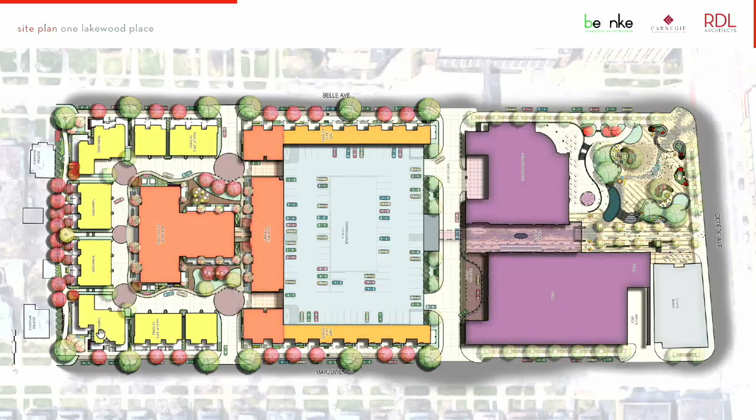This is an updated rendering that shows the direction we're going with the commercial building. The rest of this we've gotten recent approval from ABR with the residential. They really like where it's going, and you'll see some elevations as we keep moving forward. This is a rendering of the plaza, showing the Curtis block and the retail and commercial office component.

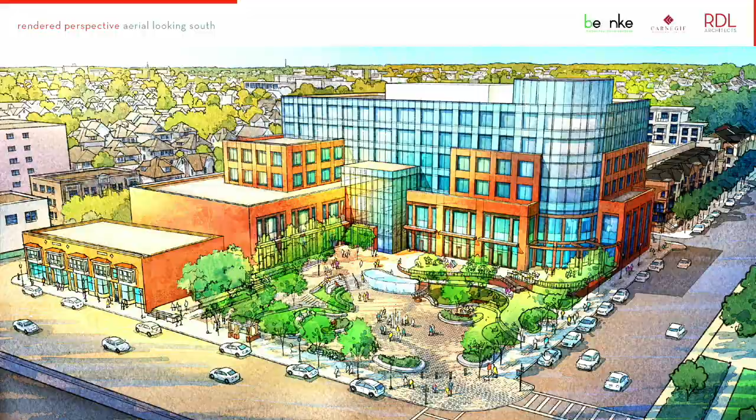So first we're going to go over building heights. The way this is set up, and most sections are set up this way, is there's a plan in the beginning. All of them are color-coded very clearly, and in almost every slide when you see the plan, the colors are consistent: gray for garage because it's cars and concrete, purple for mixed use, blue for the Curtis block, and these other colors for the residential components.

When you look here, we've tried to show the differentiations in the roof. On the office building, you can see 125 feet for a maximum potential height for this portion, 75 feet for this, and you see the setback we've done here to be kind to the residents on the street, which would be a 45-foot height. 46 feet here, and some of these have changed since what you saw previously. Similar here and here, there's a grade change from here up to here, which is why this is higher on this side. Walk-ups at 40 and 35 respectively. Again, this street right here is about almost 8 feet higher than here, so you actually drive down.

When we take these building heights, we're taking them from the point where the building meets the right-of-way. So from here up to the top is 35 feet. On the buildings that have angled roofs, it's to the midpoint of the roof, which is what the code requires, and that's shown in the diagrams. The text from the code is right here.

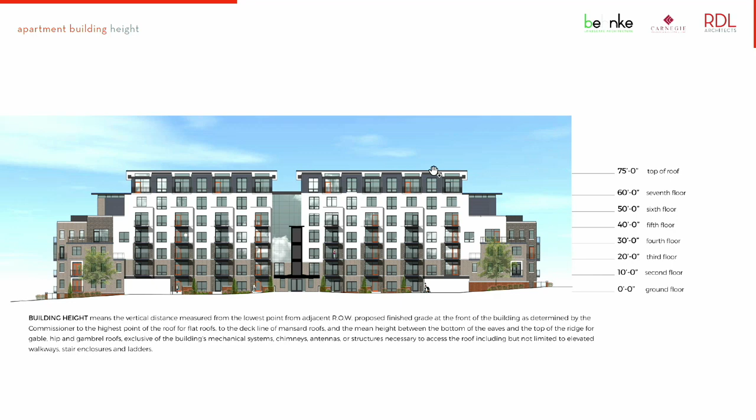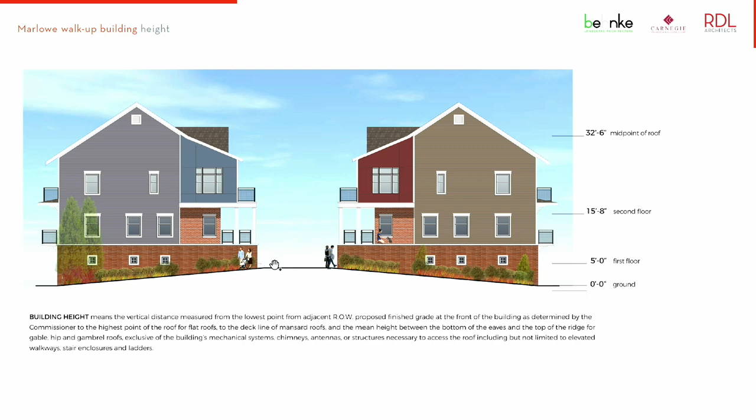For the brownstones, 46 feet at the top of the mansard roofs here. These are the walk-ups, so this 32'6" is to the midpoint of the roof, again, which is what the code states, where we take the height from. You can see the midpoint of the roof is here and here on either side. So when you're standing on the sidewalk, the massing of the building diminishes as it moves away from the street.

You can see here that grade change from the front of the building to the back, which doesn't really happen on Belle. Belle's from front to back is relatively flat across.

So these are the townhouses on Marlowe, 30'6" to the midpoint of the roof here. Again, you can see it on a side elevation, so it's much more clearly understood. And these are the townhouses on Belle.

So the difference between the units for the walk-ups and the townhouses on Belle and Marlowe is that we have that drop from the street level where Marlowe is to behind, that 8-foot drop. So what we've done is we've tucked the garages underneath the living space.

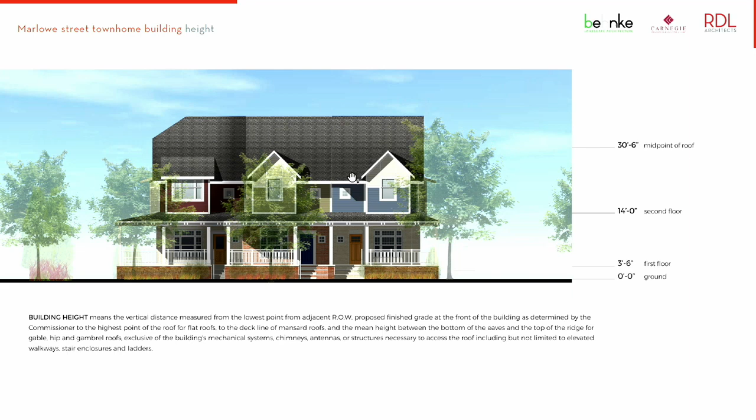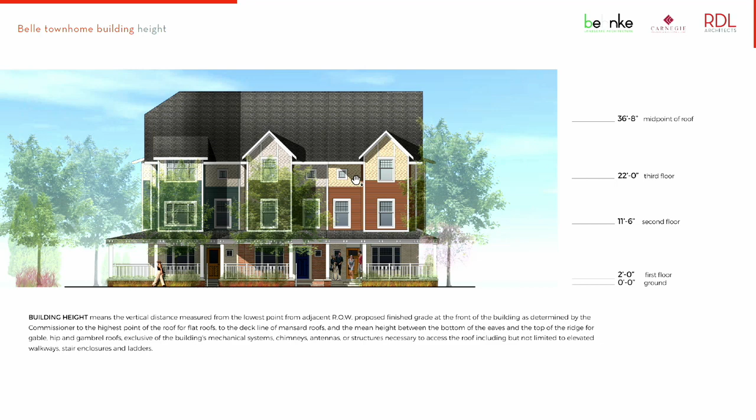We can't do that on Belle. So on Belle, the garages are in the rear of the first floor, and then there's either an additional bedroom or a den or some sort of additional living space in the front of the units.

So the next section are building setbacks. What we've done here is we've again used the same color scheme so that it's easy to locate what you're looking at. And then we've shown the building setbacks.

So here, when you see the light lavender, you can say 3'8" to 16'4" on these facades, depending on where it is and where the property line is.

This darker color, this darker lavender color, is 33'10" to 35 feet. The property line is angled a little bit, so that's where that difference comes in, whether you're taking the measurement here to here or the measurement here to here.

Same thing here for the apartment or for the brownstones, 9 inches to 3 feet. So depending on where you are along the sidewalk and where the property line is and the face of the building is, that's the range of the setback.

For the apartments, very similar condition on the sides here to the brownstones. The walk-ups, on one side we have a little bit more room than the other as far as the distance from the property line to the face of the porch, and that's where we took it from.

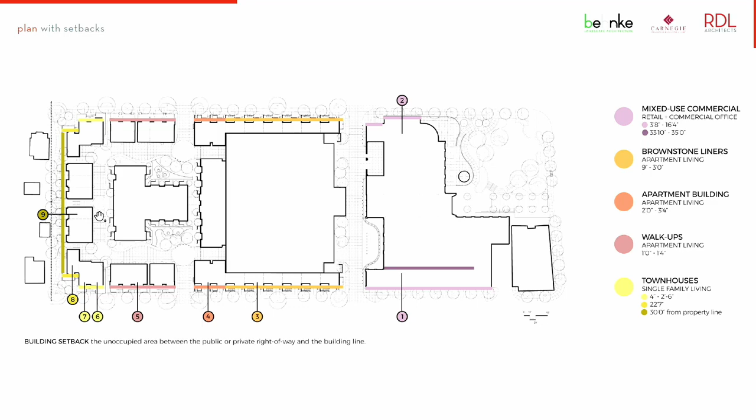That's one of the things that was talked about in the code where we can do traffic calming, and we are, all the way across the street.

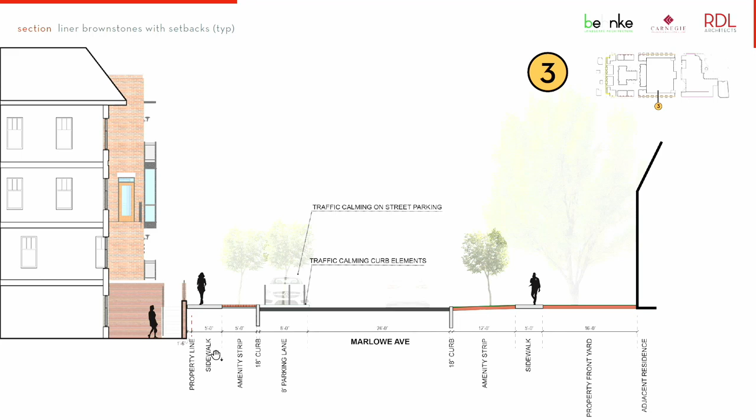This is the condition at the apartment building where, as you've seen before, we've treated the sides of the apartment building that face the street very much like we did the brownstones. So it kind of seems like an extension of the brownstone architecture as it wraps the corner.

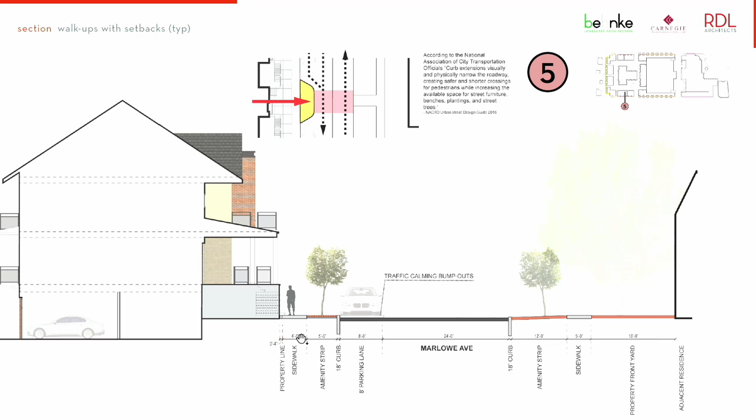These are the walk-ups. And this is a diagram from NACTO that shows the traffic calming features we've put into the streets, and again the property line, sidewalk, and amenity strip. So they're pretty easy to follow as you go from section to section.

And on every slide, as I mentioned last time, the text at the bottom explains things in further detail. Most of the time that's 100% from the city's code, or mostly from the code, with additional notes we've added.

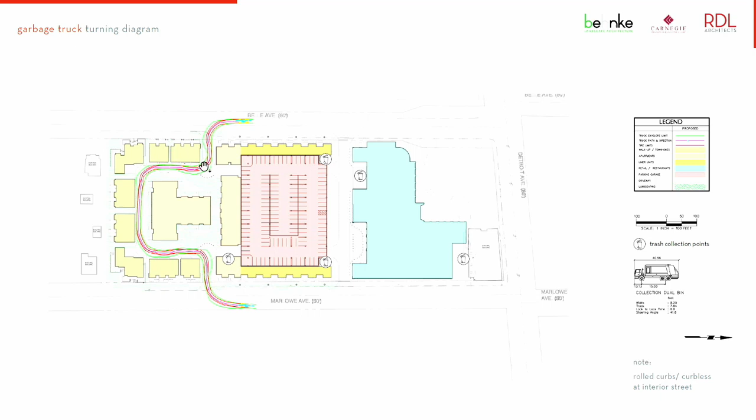So again, there's a fire truck, fire truck, fire truck. And then the garbage truck - when we show the garbage trucks, we've also shown the locations of the trash. So when the truck comes in here, he's going to back up a little bit, roll the trash out. This is the trash from the apartment building, load that up onto the truck, pick all these people's trash up just like you'd pick up any single-family residential trash. They'll put their trash out in the back, and he can get out. Again, they can do that here - pull in, roll the trash out, load it up. Pull over here, pull the trash out, load it up, so on and so forth as they go through. This trash here is intended for the brownstones, and this trash here and here is for the commercial users.

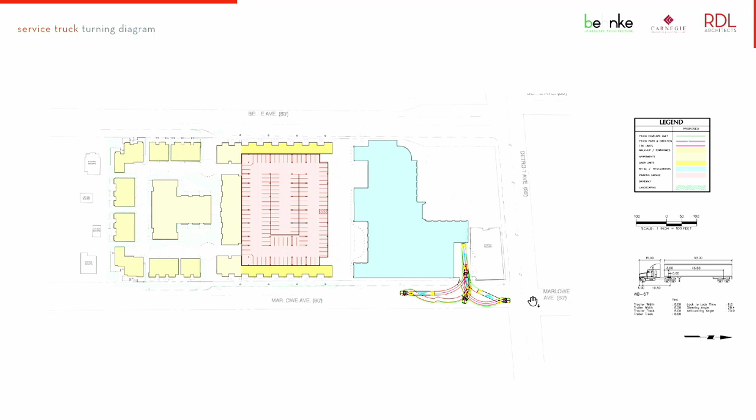This also shows how trucks would make deliveries. Trucks are required by the city to use Detroit Avenue and not the residential streets to access this.

So if your grandma moves into this apartment and she has trouble backing out, she can go over the curb and it's all good. She's not going to hit anything, right? Unless someone's standing there. But you can see all this here.

And this shows the dimensions in the plaza, and it moves through the site, so you can see everything clearly laid out.

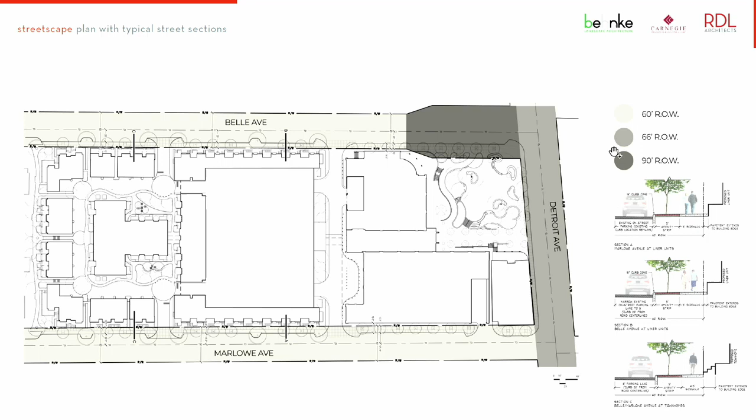Then here we have typical street sections, and the right-of-way widths for all the streets around. This diagram is also paired with the setbacks, so you can compare the right-of-ways and the setbacks all on one sheet.

For landscaping, this is actually more than is required for Planning Commission, but we already did it for ABR, so we're going to show it to you too because it's beautiful. You can see all the different types of plants, what the species are, the numbers of them, the sizes of them, and this is also divided up into different parts of the site.

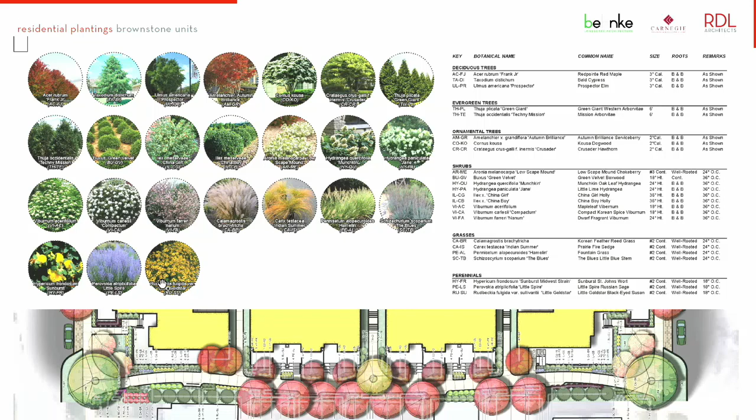When you look at the plan, it does really give you an idea of what it's going to feel like to be in some of these spaces. This is the paseo - these are the courtyards, the residential courtyards, the paseo that goes by the apartment entrance, and then the little street we have on the interior of the block. This is the paseo, the plantings intended for there.

These are the walk-up units. You can also see here what's intended for the streets. Again, you see this information in multiple ways throughout - where we have the street section, you're going to be able to see what this is and understand it. You can also look at it here in plan and understand it.

So by comparing some of the sheets, there's a lot of information - it's the same information shown in many different ways, so you can really get a good understanding of what it's going to look like. This is the commercial building along Belle Avenue, and then the commercial building along Marlowe Avenue.

Circulation - we've divided this up into pedestrian and vehicular circulation. So on this diagram, you see the primary paths. These are really like pedestrian circulation through the city, so you're on a city sidewalk.

Secondary circulation paths cut through the site - this is the paseo. These are the two major paseos we've created through the site, and this is the additional street we're bisecting the block with.

These show the primary ways of entering up to the Winter Garden and accessing the commercial components of the project from the main streets. The tertiary paths are additional pedestrian paths we've put through there - a cut through on the block, and cut throughs from the Paseo back into the apartment building.

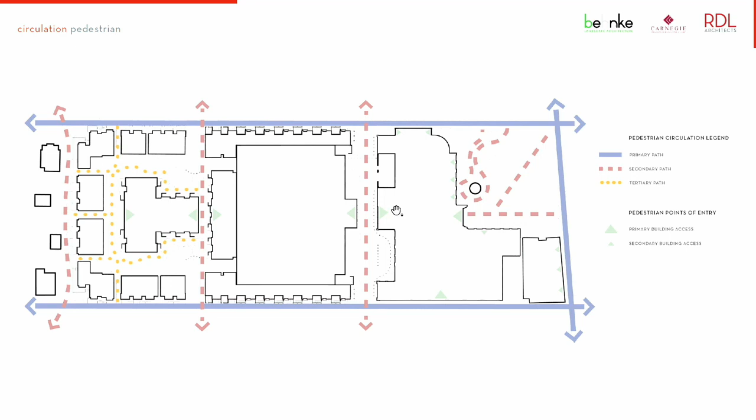Chris, you want to come up and talk about traffic?

So it's always tough following the architect because they have pretty pictures and everything looks great. And then I come up to talk about traffic, and nobody likes traffic, so... I was going to tell you not to make them snooze. But yeah, so I will try my best. Thanks, Greg, for going first.

To recap briefly where we left off last meeting, I gave you a big picture overview of what the traffic study was and what it included. One of the things I wanted to recap was we did a trip generation comparison - basically how much traffic the former use generated, the hospital on the site, versus what the proposed use would be. Those calculations yielded that in some cases the proposed development was a little bit less, in some cases maybe a little bit more, but overall almost kind of a wash.

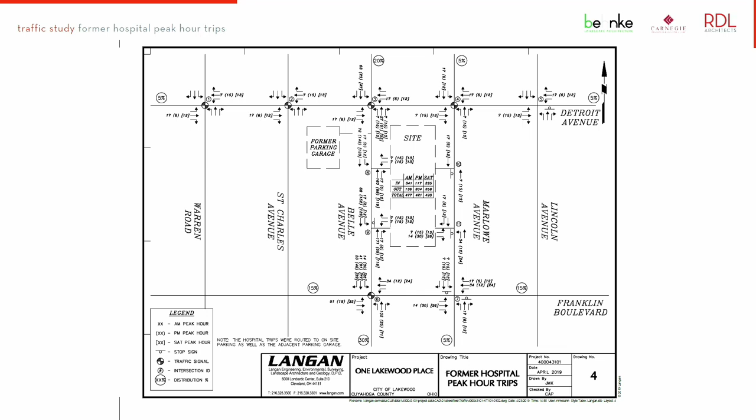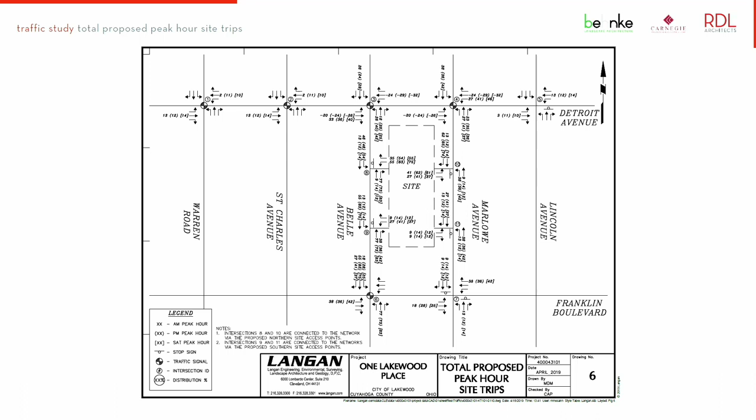This next one shows, with that change in the shift in traffic, what that no-build condition would be. We updated those volumes and updated the analyses. Likewise, we made some slight adjustments to the distributions for the proposed development. This figure then shows what that would be when you add the existing volumes plus our proposed development on top. We run through calculations to do this grading system on how traffic is operating.

In the report, it's a bunch of tables. We tried to condense it here for you, I guess, to better illustrate so you don't have to sift through.

So basically, at an intersection here, we show what this left turn movement is operating at, as well as this shared through-right movement, and then overall what those two movements together make that approach, and how that approach is operating, on a grading scale A, B, C, D, E, F. And then when you do that for all approaches, it calculates how you grade the intersection.

Although you might not be able to see the various letters here, hopefully you can pick out the colors. So level of service A and B, overall intersection, we labeled with green. You can see all these intersections under the proposed build conditions, with the proposed development, are operating at a level of service A or B. So good, good, good, good, good - this is all very, very good.

This intersection here is operating at an overall level of service C or D range. Again, C or D is acceptable in urban conditions, so no issues there. Overall, with the proposed development, we're not projecting any kind of traffic issues specifically at the intersections and how they operate.

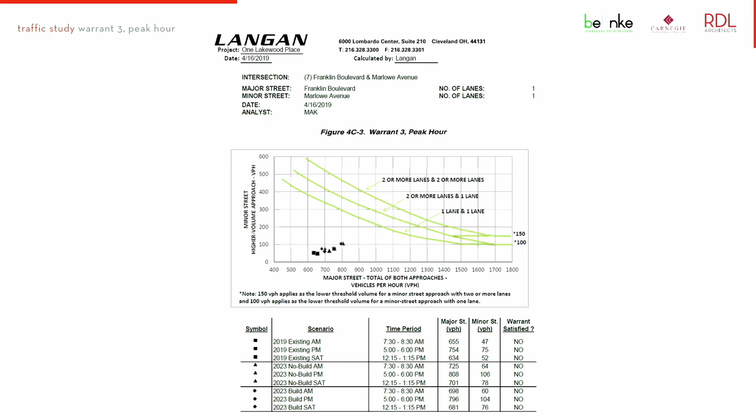Typically, if you don't meet a peak hour signal warrant, you're not going to meet any of the other 9, 10, 11 warrants. So it's a good rule of thumb just to see if you're possibly going to meet it or not going to meet it at all. In this case, you can see we're far below. You actually need at least 100 vehicles on the minor approach, on the Marlowe approach, to even hit the line. But to get there, you have to have 1,400 to 1,500 vehicles on Franklin, which in this case you can see we're down here.

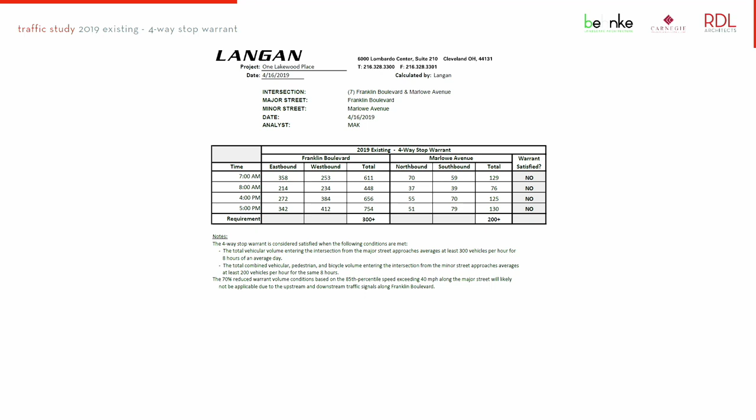Then we looked at a four-way stop warrant as well. The purpose of a four-way stop is when there's an equal distribution of traffic on all approaches. Again, the bulk of traffic is on Franklin, and Marlowe is very light. The Franklin approach needs to have 300 plus, which it does, but the Marlowe approach needs to have 200, which it doesn't. So this is existing, and then again with the former hospital, again we're not meeting, we're not coming close, and then with the proposed, again same thing.

So to answer those two questions, both the signal warrant and the four-way stop warrant were not satisfied. I think I hit on all the comments.

Thanks, Chris. Okay, so we're going to review the plaza. What we've done - this is an illustrative site plan showing the intent for the plaza currently. It's still something we're working on, but I wanted to go through how we got where we are today.

So this is a diagram that shows all the conditions we're going to talk about on one page so you can see how they relate to each other. The first thing that really set the tone for the design and the direction of the design was the topography. You can see here this is at 74 feet, this is at 83 feet. So there's about a 9-foot grade change that we need to make from this corner up to here. It's less from here to here, but not by much.

So what that did is we thought, okay, we need to put some ramps in here to get people up here. So what we've done is we've created two ramps that are ADA accessible, to the point where they don't need railings, so they don't feel like something separate. I had to walk down an ADA ramp today, and I was like, isn't there a faster way to do this? Because you're like, boom, boom, boom, and there's railings, right? So this is to create a really nice environment so everybody feels like part of this space.

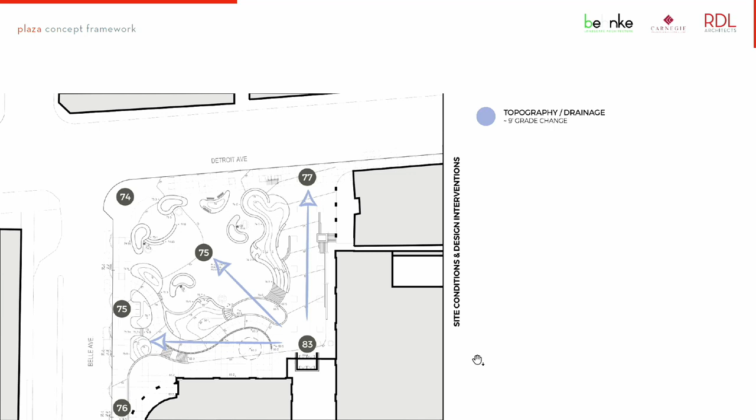In this area where we had to take up the grade, we put in plantings and used that topography to create a really nice layering effect, allowing people different vantage points from within the plaza, whether looking up or looking down. Changing the vertical space in a plaza makes that space so much more interesting for people to use.

The next thing is to define what is the privately owned public space. This portion of the plaza is that half acre that is privately owned land but intended for the public to use. It basically cuts out this portion, seen on another slide, that's for private dining for the restaurants. There will be public access up here, so the public will be allowed to come up on a daily basis anyway, but this is just getting into the technicalities of what the agreement says.

Here we're showing circulation. You can see these two ADA paths we've created, the existing circulation of pedestrians on the city sidewalks, and all the different ways we've created for people to move through the space. If you enter at this corner, you can go up this staircase, or up this other staircase, or walk up this hill with this break in the seating. As you enter here, you can cross the path there. The point is that there are a lot of different ways to move through this site, which makes it much more highly experiential and interesting for people.

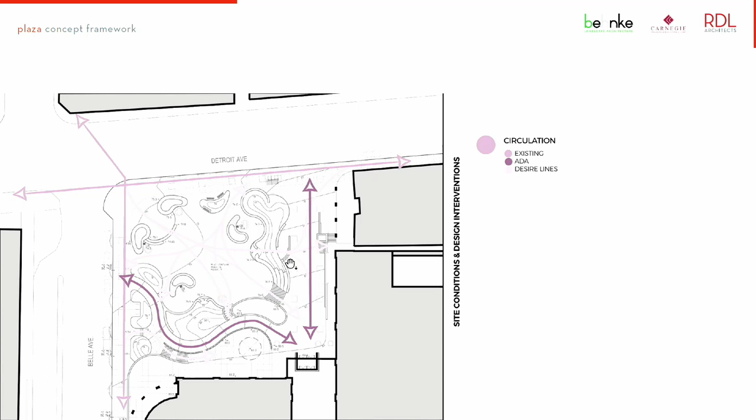The other thing we've done is mix a lot of organic shapes and forms with some formal elements, like the allée. There's a formalism in that when you walk in here, you're centered on the splash pad intended to be at this entrance. As you walk in here, you're going to look up over the water wall to the entrance of the Winter Garden. So there are all these formal views we've created. All of these things come together so that when people are moving through the site, it's going to be a really great experience for them.

Then there's the hardscape portion of the plaza. This lower portion of the plaza is intended to be pervious, and the rest of the site will use other different types of brick materials.

We have the landscape plan, so you can see in the darker green where there will be grass or different kinds of plantings, and the lighter green are the trees. We're thinking about this very three-dimensionally, not just the horizontal surfaces, but what's your experience in three dimensions - what's vertically above you, creating a canopy that provides shade and also absorbs some of the sound from the city.

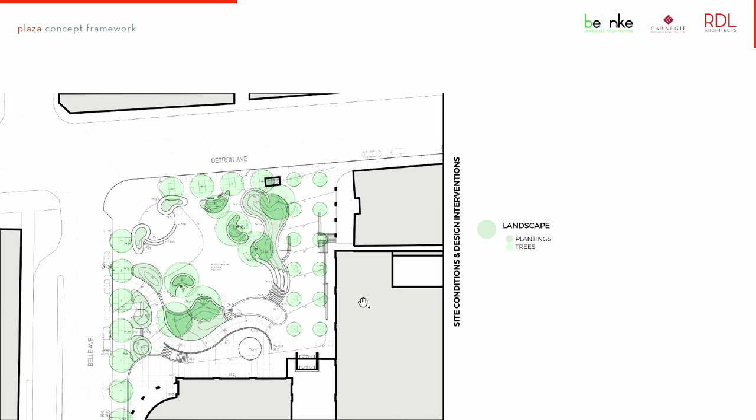Then there's seating - different types, fixed and movable, which you can see here. There are fixed seating elements along the walls, and various different types of furniture - movable furniture, park benches, which are also fixed. The point is we're using best practices here. One of the best practices is that for every 30 square feet of space, there should be 1 linear foot of seating. So we're doing our best to meet all those best practices as we design this.

If I were to go into all the details, it would be like a class in here, and we don't want that. I just want you to know that when we're designing this space, we're taking all those things very seriously. This portion right here and this portion right here are intended for outdoor dining for the various retail tenants that will be occupying these spaces.

This is a zoomed in look at the plaza. You can start to see how we've transitioned from the lower area to the upper area. The other thing we've done here is, this is a commercial building that will have retail and office components. Part of our client's ability to sell and lease this building is that the commercial office component has access to this plaza.

So we've divided it up into three primary spaces: this terrace up here, or veranda, as George likes to call it, which I think sounds kind of sexy; then this right here is the allée; and then we have a lower plaza here.

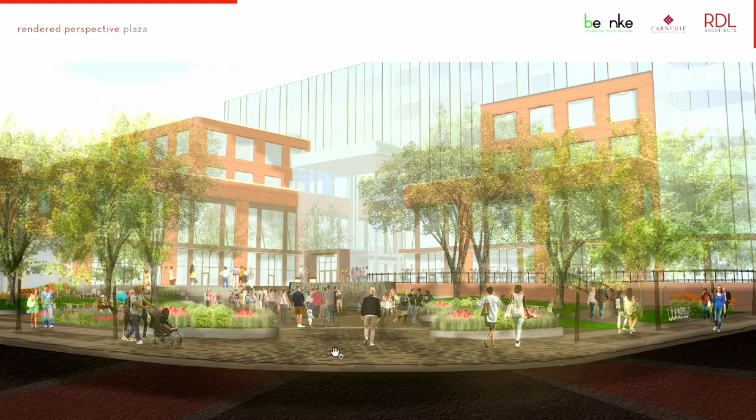This is a view looking from the corner in through the plaza up to the Winter Garden. This is not a final rendering, but it's intended to give you the feel of what it will be like as you're entering into the plaza.

All the light on the site will be at 3,000 Kelvin, which is more of a warm light. We're not going to do 5,000 Kelvin, which is cold. 3,000 Kelvin for the light across the site is going to be what's used.

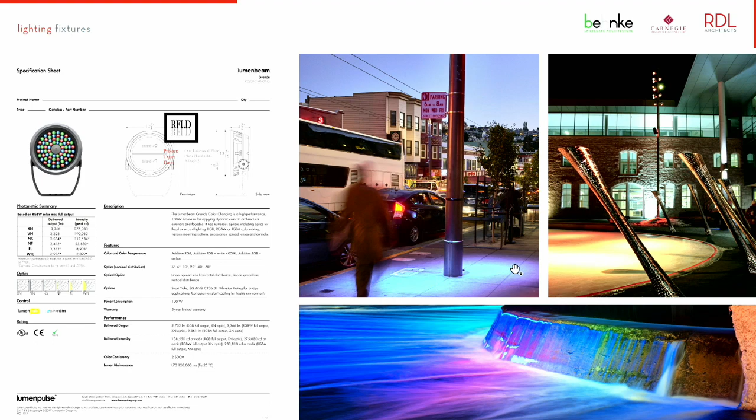These are the colored lights intended for the plaza. It's not going to be like Vegas, so it'll be gentle and soft on most days, but it gives the opportunity for the city to have an event. We were talking about maybe a winter solstice event as a counterpoint to the summer solstice that can happen in this plaza. Then we can light up the plaza in blue, violet, lavender, magenta, or whatever. This light is all focused right here in the center of the plaza, so there'll be fixtures that focus down on the center and create pools of light.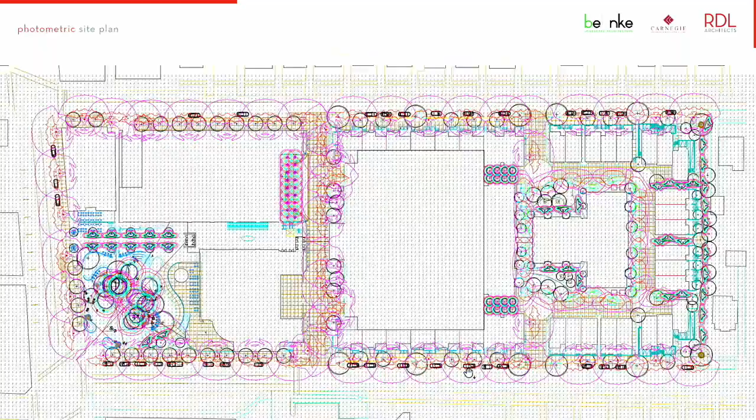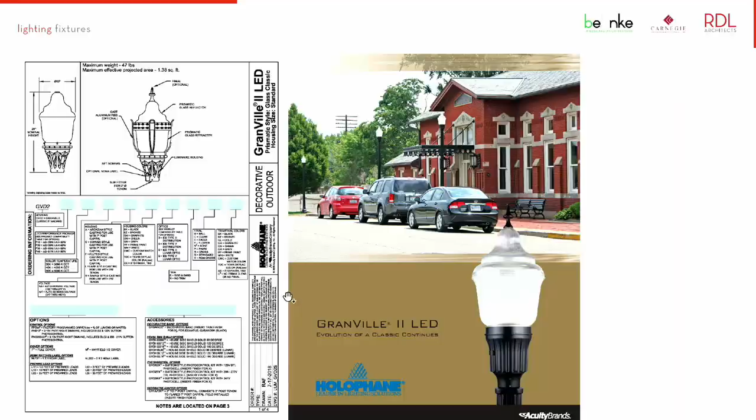This light is what's intended for all the benches in the plaza. Going back to the seating walls here, and underneath the seating walls on the islands, that light will be—not this curvy picnic table, but under here and here—emanating from underneath the seat, providing a soft, warm glow.

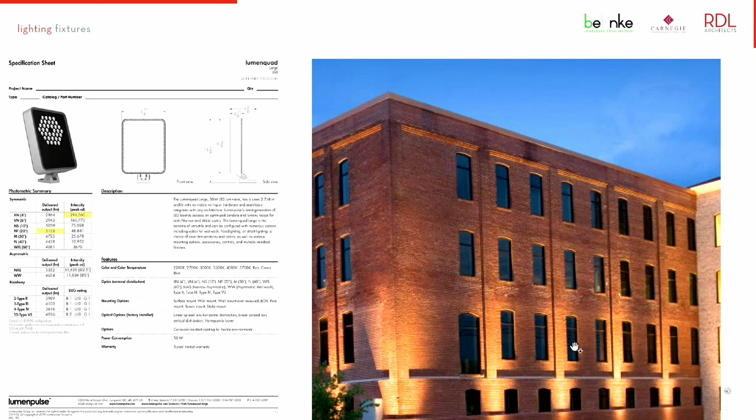The intention for the building facade is to be really subtle with the lighting, so only on certain portions of the building facade do we intend to do some gentle uplighting of the brick. And that brings us to the end.

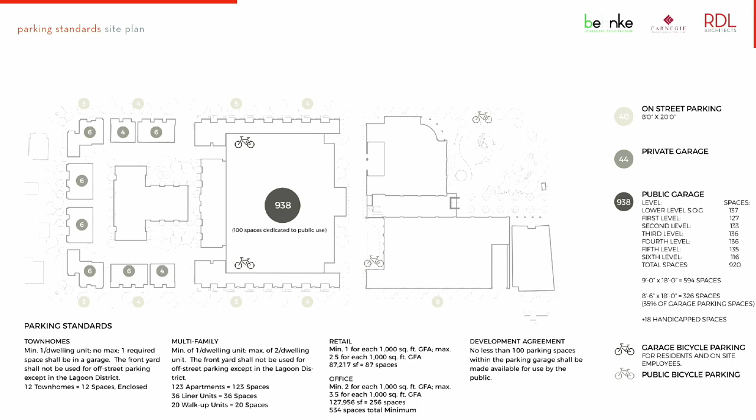Just a question for Greg. The Curtis block, Curtis building, the height isn't specifically called out in your diagram. Is that assumed that there's no addition at this point planned? Correct. We're still reviewing that, and we're going to be reviewing that with the Architectural Board of Review as things move forward.

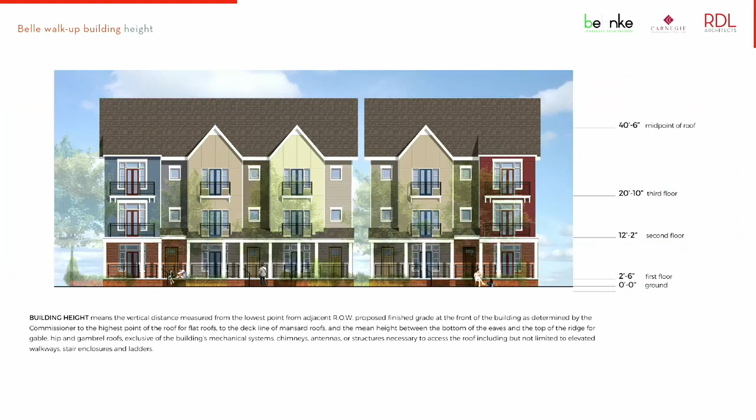God bless you. That's a designated landmark as well, right? So there's that whole process to go through for any additions. Yeah, any modifications, in fact, the design of that space is required to get what's called a certificate of appropriateness from the Architectural Board of Review.

Any other comments or questions at this time? I have a question for planning staff. So since a private public area is not regulated in the zoning code currently under conditional uses, do you recommend that we add a condition regarding hours of operation for the public square? Or is it the intent that it be open 24 hours a day for the public?

That is a great question. Can you allow me some time to think through that, maybe as we have some dialogue? I'm not sure, but let me take a pause and think through that a little bit. Same thing back to you, Monica. Any thoughts there? Let's circle back to that maybe in a few minutes. It's a great thought.

With that, then, I invite the members of the public who wish to speak on this issue to please come forward. Many of you have been here several times. Come on up. If you are going to speak, please sign in and tell us where you live and what your comments are. And the chair has the privilege of recognizing Master Cruson as, I think, the youngest commenter that we have ever had at the Planning Commission.

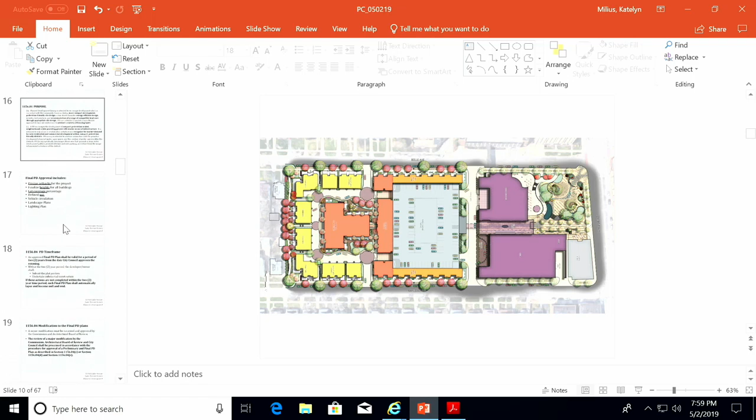Real quick, Mr. Chair, I can directly answer that. Ben, in Chapter 1156, there's two specific sections that address this. They're more framed around modifications. There's what's defined as minor modifications, which in the code is defined as anything that's not a major modification.

A major modification is the addition of property to the plan development, or the addition to an already approved final PD plan that would change the mix of uses. The major modification would essentially have to go through the City Council, Planning Commission, ABR process from start to finish. A minor modification would come just in front of ABR or Planning Commission.

So let's come up with an example. One of the floors of the office building goes from 6 to 5, or a major material change comes in after they value engineer the project, or something like that. It would have to come back before the ABR, and depending on the topic, potentially the Planning Commission.

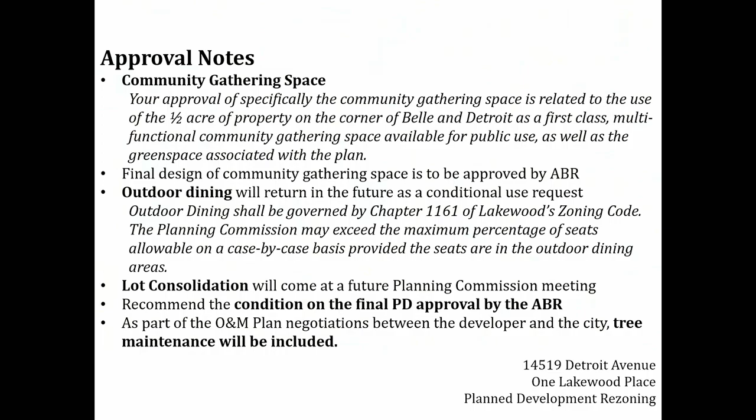Okay, we will move on to our next docket item, which is docket number 030519, Lake Avenue Homes, Plan Development. The applicant, please come forward, or?

We can do a quick intro. Maybe go back, if you don't mind, I can run them through that. I'll keep going, you're good. So, Mr. Chair, I think we're just trying to pull up the current plan set.

Just wanted to take a moment to introduce this project. Similarly to the One Lakewood Place site, we're introducing the WXZ and Dimmitt architecture team back in front of the Planning Commission. This project is being reviewed under the Plan Development Code. Tonight we wanted to put up a simple agenda for this docket item. We're shortly going to hear from WXZ and Dimmitt on the updates made since they received their preliminary plan approval vote in March with the Planning Commission.

The city has done some analysis it'd like to work through with the neighborhood and some of the code analysis. We're then going to turn it open to the Planning Commission for questions and feedback, then open it up for public comment and questions. We'll make all the notes and questions as public comment comes in, close public comment, and work towards discussion on those comments. The city is likely going to have answers to those. We'll invite WXZ and the Dimmitt team back up to answer those questions, and then consider a vote at the end.

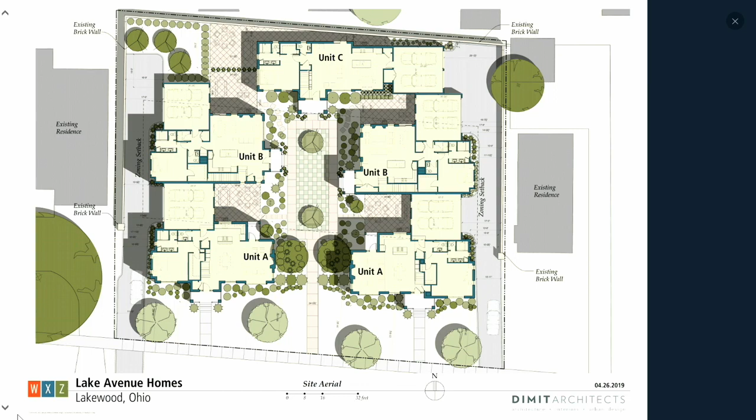We've also brought down the massing of that C unit, which you'll see in some of the sections, creating more space not only on the south portion of the site with the A unit to the sidewalk, but the C unit to the back of the property as well. Here are some blown up dimensions: we're about 6 feet off the north lot line at that C unit where it has more mass, and the garage portion, which is the tightest, is only 1 story tall, trying to get the massing down to address concerns of privacy to the neighbor to the north, as well as overall massing on the site.

You can see the dimensions around the drive. We walked through with our template to understand how drivers will get in and out of there. On the northwest portion of the site, in the last ABR meeting we had a couple of open parking spaces for visitors, but it was noted that with Lake Avenue having parking there, that was not necessary, and it also brings in somebody not used to the site.

These are people who are going to park in their garages every day. They're going to understand how to get in and out of the site, but it also allowed us to get a larger backup space for that northwest B unit. We have a little bit more room on the west portion of the site for the C to get out. There's 26 feet to the wall, and we're showing two dimensions there—one to the wall and one to the lot line—just so you can understand the unit's relation to the property, but also the vehicular access throughout.

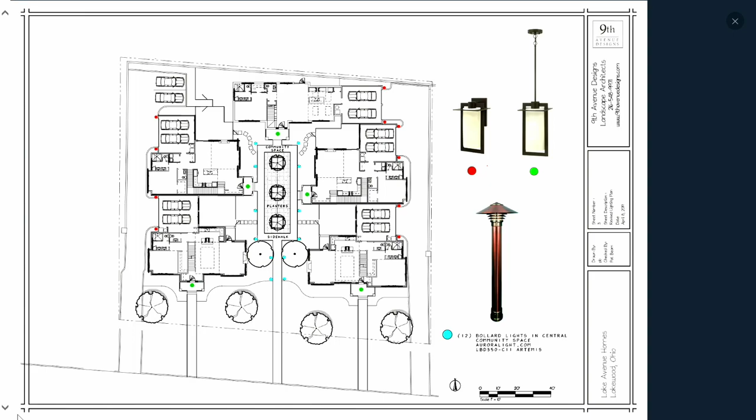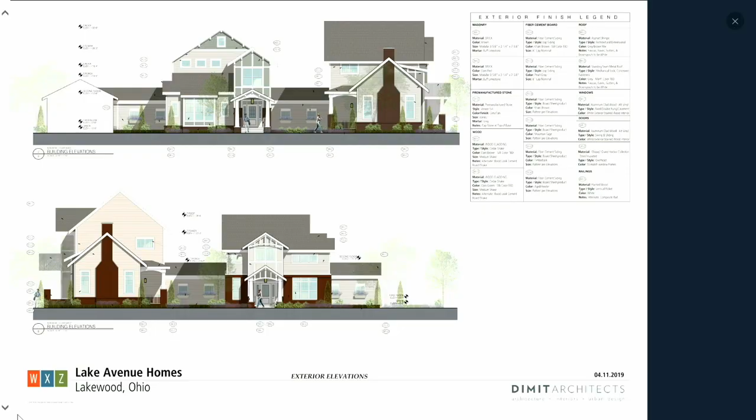This is the C unit in the back. Again, I think this really shows a good visual of the neighboring property's view of the back of this house. You'll notice in that upper left-hand elevation there's a black line going across there - that would be the height of that brick wall on the north side of the property. And in the side elevations, again, that brick wall is pretty tall there.

Again, bringing that massing down as much as we possibly can, but still allowing some light into that unit with some dormers up high.

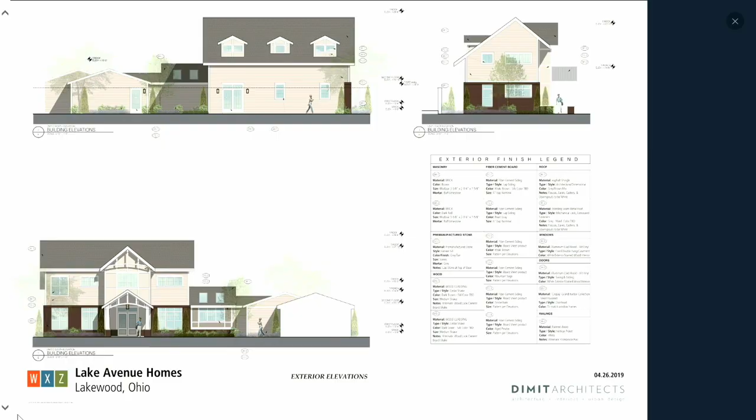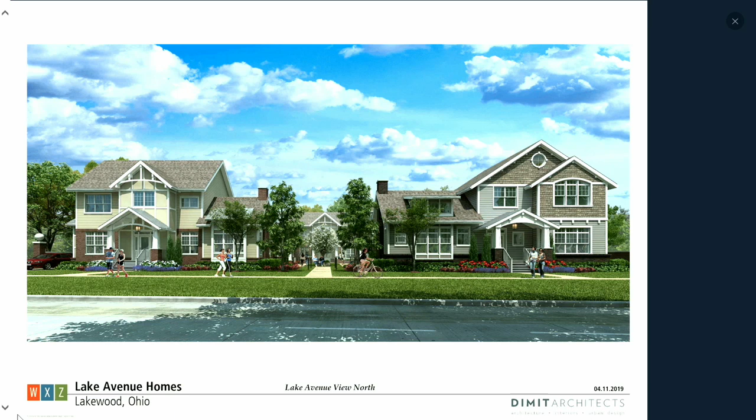So we've updated the renderings, obviously, for the setbacks, but for the architecture internal to the site as well. This is the Lake Avenue view, kind of looking straight down that mews space. You see the planters with the trees down the mews space. And it's kind of hard to see in this rendering, but the left unit, the west unit, is being pushed back further now.

Still proposing, and approved by the ABR, the same architecture that we were looking at previously in terms of materials and scale of details and that sort of thing.

This is looking from the southeast towards the northwest on Lake, and then the opposite way. Again, we're really noting that brick wall - you can see the pier with the round ball on top of it. Really trying to push that out, push that unit back as far as possible so that we can hide the garage of that unit.

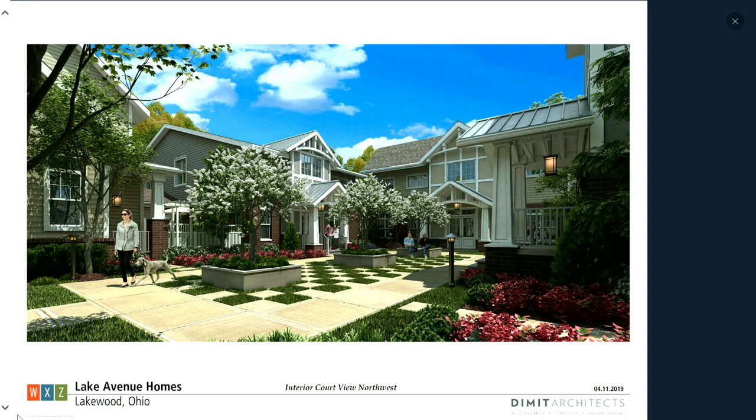This is the previous view of the internal mews space before we had our landscape architect on board, and notably that large blue townhouse element really brought the scale down so it doesn't feel so oppressive in that space. We have not had this rendering updated, but on the site plan you'll notice we took out that middle planter box at the request of the ABR, just to open that space up more and give residents more room.

Again, that view looking the other way. Just some architectural elements, and I don't really have to go into detail on these because it's not really Planning Commission, but just to talk about the details we're looking at. These have all been sent to the ABR.

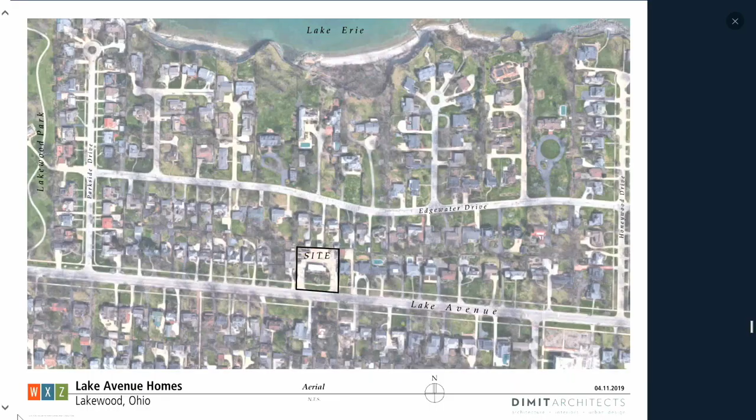And I believe that's everything. We did submit a traffic study as well. That's kind of a pre and post comparison, and those numbers are obviously drastically better now that it's not a gas station. It's 5 homes, so those numbers have gone down pretty dramatically. I think that's all we had submitted.

Good, thank you very much. Any further comments from the city? Yeah, Mr. Chair, we have a few slides that we just wanted to work through and then open it up for initial comments and questions from the commission, and then we'll open it up for public comment, if that's okay. Very good, thanks.

So, Mr. Chair, similar to the past approval, the final PD approval would include the precise setbacks for each of these units, the final heights for all of the units, which is in the packet, the lot coverage percentage of the buildings, the defined use as residential for these homes, the vehicle circulation, the landscape plans, and the lighting plan for the site. These are all the elements that would become part of the zoning and unable to be modified without approval by ABR and Planning Commission, and potentially Council too, if it's a major modification.

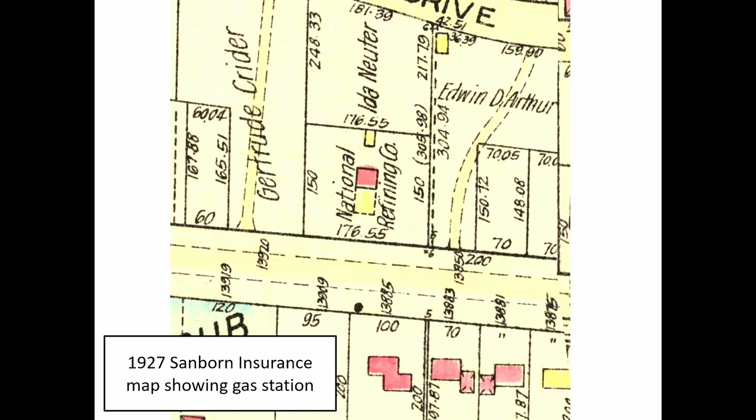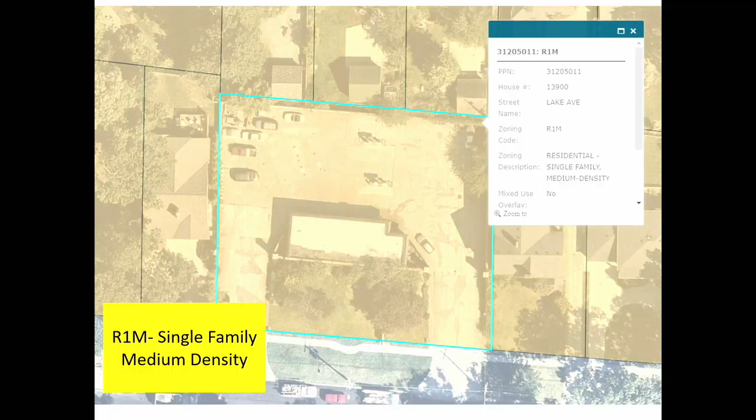History of the site: the 1927 Sanborn map shows that this was a gas station long before the homes were there. So it's an existing non-conforming use in an R1M single-family medium-density district. This is the existing site. There are currently 2 curb cuts, more than 30 feet across, accessing the auto mechanics shop and the gas station.

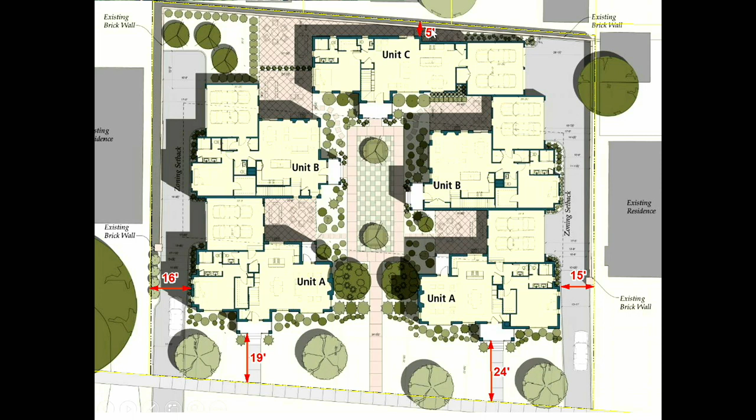As shown, the existing setbacks from the front, the building line setback is 19 feet on the west, 24 feet on the east. This is to the open front porch. To the buildings themselves it's about 30 feet, 16 feet from the side yard and 15 feet, and then 5 feet from the rear for that 2-story portion of the building. All of the buildings are just under or at the 35 feet maximum for a residential district, and fit within that surrounding zoning for height.

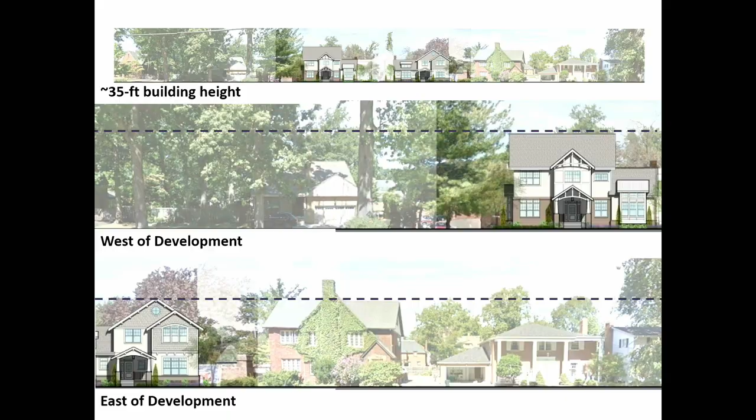As part of the code review in 11560-2A, the past use of the site and the zoning of the abutting properties should be considered as part of your approval. The existing use, being a gas station and auto mechanic shop, is an existing non-conforming use in this neighborhood and zoning district, with the abutting properties being single-family, medium-density residential. The proposed use of 5 single-family homes is more conforming with the district as a use. As a precedent, if a home had at least 10,000 square feet and was going to 5 residential units, that would become less conforming with the use. But this is becoming more conforming in this neighborhood given the existing use being a gas station and auto mechanic repair shop.

In 11560-3, it states that the PD shall comply with the setbacks from adjoining residential uses. Any deviations from that would need to fall under the commission finding that the deviation is solely for the purpose of promoting an integrated site plan that is consistent with the community vision.

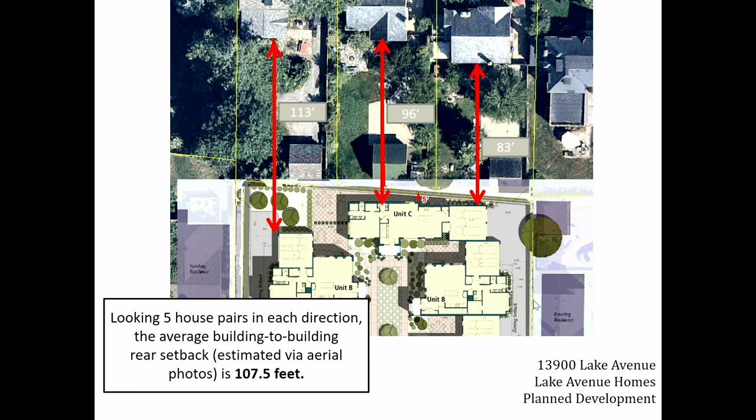Like the applicant stated, there has been a lot of work on that rear unit to help it better comply and improve the privacy for the unit, the house behind it. So they have lowered the grade a bit in the rear to increase the height of the wall according to the first floor of the unit. They've worked to put the bathrooms in this portion with the dormers so that these windows would be opaque and not necessarily something people are looking through daily. And they've worked on the roof structure, the roof line, to reduce the mass of that building.

Looking at the legal setbacks in the area, along Lake, the building line setback is 50 feet. So this would be increasing the building line by approximately 30 feet in some areas, and then 48 to 24.

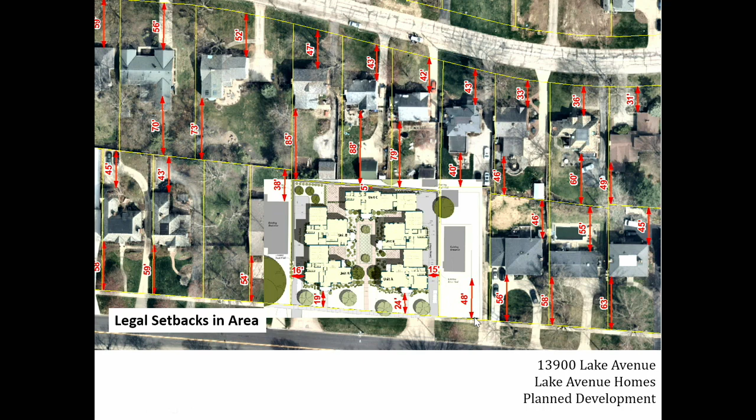Looking building to building, we have about 207, 181, 191, 210, so we still have a fairly significant building-to-building setback.

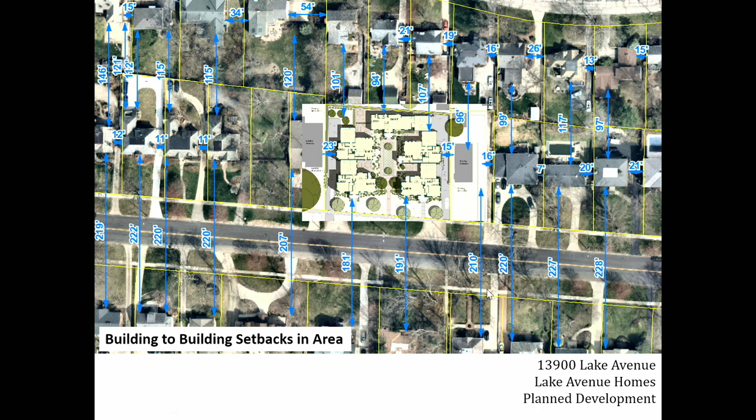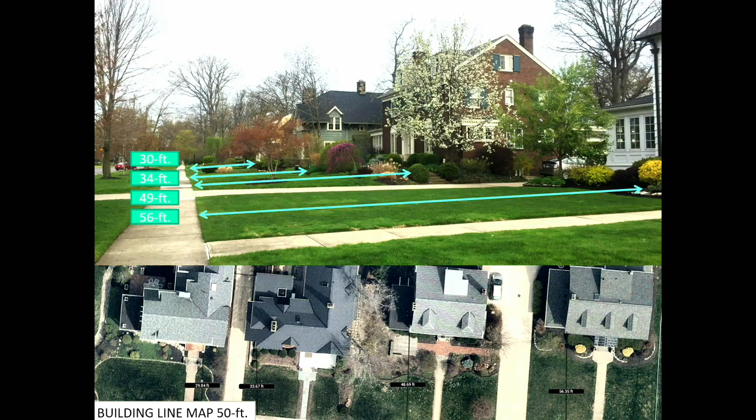So looking at the site that we are reviewing plans for today, we have a 48-foot setback to the house to the east of the site. The front porches would fall approximately where these trees are currently located. These trees are 20 feet off the property line, so those porches would be right at those trees, and then the house would be an additional distance back. So at this corner, the house is 31 feet away from the right-of-way, so it would be about a 20-foot, 17-foot distance from this house's front.

Again, looking at the two trees that are in front currently, that is approximately where the porches would fall, the open porches, and then the building portion behind that.

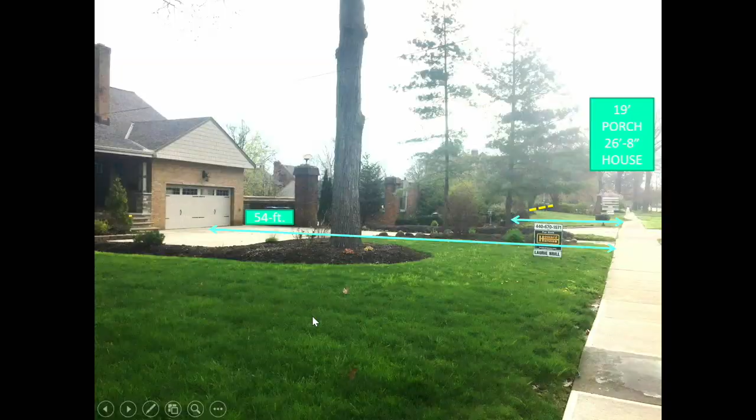And another view from the sidewalk, approximately 54 feet to the house to the west, and then using the existing trees as reference, approximately 19 feet to the porch of the west unit and 26 feet 8 inches to the house.

So one thing we wanted to note as well, in the site plan that was shown today, which we believe there has been a modification to, but they did not show landscaping in front of this wall, and we think that is extremely important to buffer the buildings that are being proposed. So making sure that landscaping is included, and if possible, if it's possible to save these trees, we think they should make every attempt to do that because they would add buffer if it works to work with them.

So, Mr. Chair, if Planning Commission was to vote on this tonight, we do have findings that we would recommend as part of this to not set a precedent for future houses, but have clear findings for this decision.

So questions, for instance, like landscaping - has a landscaping plan already been approved through ABR? There is, yes. And specifically related to the screening trees, I believe that's part of their landscaping plan; I think it was an omission on the submittal here. So it's already approved, just not depicted here? I think only specifically on those trees that Katelyn mentioned before, which border the western property line. But that's a point of clarification we can bring up.

But yes, ABR's approval did include a full landscape plan. And the lighting question - that's also already been approved. A photometric study is still forthcoming in support of the lighting plan? That's an ABR-approved item, not specifically before us. Correct. The important item on the lighting plan is specifically the photometric study showing zero foot-candle onto any abutting or adjacent property. It's not only an ABR requirement, but a requirement of the building department, so we can't issue permits unless we have fully vetted photometric studies.

Any initial comments or questions from commission members?

Hearing none, we will open this up for public comment. I first want to thank everybody who submitted written comments. We asked for them, we appreciate written comments, and we're able to digest them as they come in or over time. I've read them all, I have the packet here. So I want to thank everybody who has done that. Anybody else who wants to comment, please come forward and sign in. We would very much like to hear your comments this evening.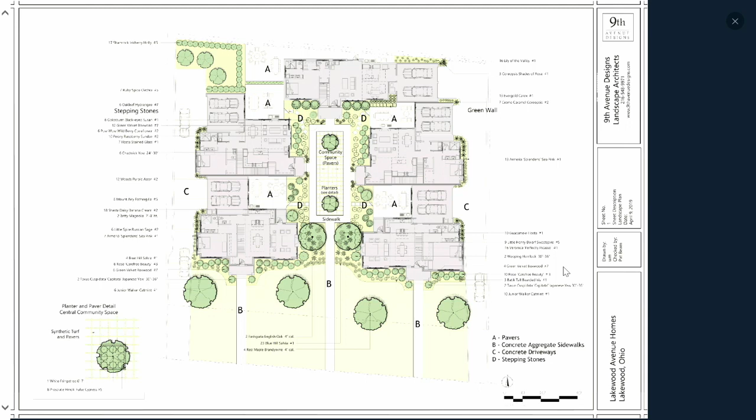Okay, my name is Carolyn Gregory. I live at 13888 Lake Avenue, next door - if I could have a plan there, good, thank you. I live in that one on the right. And I have some questions I would like to have answered, if at all possible, tonight or whenever. Did you get my emails? I have all those emails.

Just a minute. Okay, first of all, I'd like to address the density. There's questions I have with the density, it being more dense than the surrounding area - 8 units per acre within the site versus 4 units per acre in the surrounding area. So it just gives you an overall concept of the density change.

I'm worried about the exterior maintenance and accessibility of Unit C as this sits now, and I'm wondering how that would be addressed. What about snow and leaf removal, mostly on the right-hand side there? There's just not very much room. And extra parking for the whole site - is there going to be extra parking, and how would that be addressed? The problem is at Lake - this was brought up in another meeting, and it was said there was ample parking on Lake, which there is, but it is restricted. When rush hour is on, there's no parking, they will haul you away. So we have restricted hours in the morning and restricted hours in the afternoon.

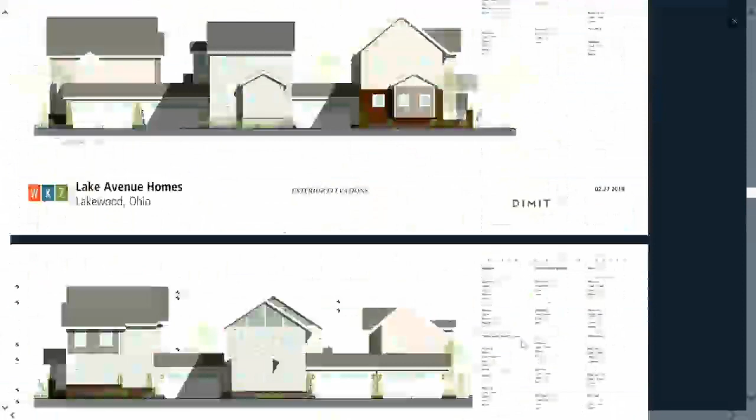Thank you. Mr. Chair? Yes, Ms. Cruzen. Can we go back to the site plan for a moment? As I understand it, there was a photometric drawing shown that had parking in the northwest corner, which has since been eliminated per the ABR. I'm looking at this plan.

I too echo some of the concerns of residents in the neighborhood and feedback we've gotten through the letters, concern for the front yard setback. Looking at this plan, I think there's an opportunity to gain another 5 feet on the western 2 units by shifting the patio that serves Unit B in the northwest corner to the north of the parking garage. It does two things.

One, it eliminates the awkward placement of the patio directly outside the window of the master bedrooms of Unit C. And two, it would allow you to shift the western units A and B back 5 feet. I know there's probably a desire to have access to that patio off of the dining area in Unit B. You could put a pathway there that would carry you to the north of the garage for that patio. So that's a clear way to get 5 feet that would bring it further into compliance and further into lining up with the 23, 24-foot setback present in the eastern Unit A.

Typically everything we're doing now, we will go for some green certifications. I'm not sure what program yet—we're studying LEED for Homes right now. We've been doing that in all of our current for-sale housing projects. The tricky thing with the LEED program we're trying to sort out is that we have buyers coming in, and if they want to put a rain shower in or something like that, it can mess up your scoring. So we're tweaking that a bit right now, but there will be a green certification for the homes. I can't tell you if it'll be LEED or Enterprise Green or whatever program, but we will build to green standards.

And notably, the energy code, even for residential, has advanced dramatically in even the last 5 years. In terms of insulation in the walls, 2x6 walls with R20 insulation and R40 in the attic—that type of thing is now code required. So that will be the lowest starting point, and obviously we'd be much above that.

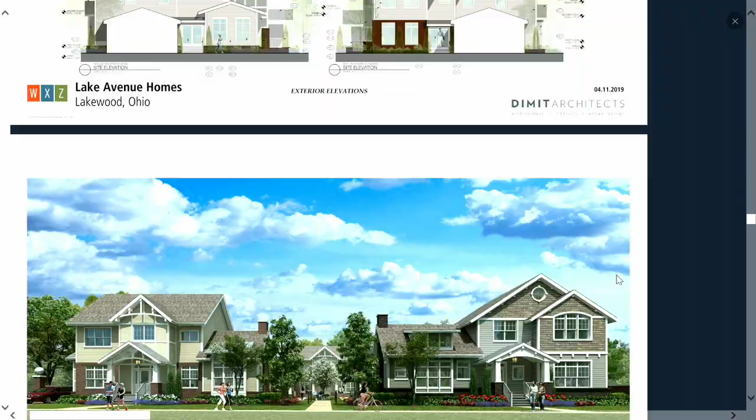Mr. Baker, any thoughts? I don't want to mistake my understanding of that setback. That back unit is the one that, of all of them, gives me the most hesitation. However, between me and my neighbor's house is 3 feet, and I have enough room to do all the maintenance I need to do, and I don't feel unsafe there. That's not an uncommon distance between houses in Lakewood. It is a little uncommon in this neighborhood, which I think is the distinction here. However, I can't say it any better than the chair said it, as far as the fact that I don't see the Planning Commission or the city recommending planned development all up and down Lake Avenue to do 5 units on two or three parcels.

As I think about this, I think we very well could have had another developer come in here and try to put 10 units in, a townhome style development that seems to be very popular, and I think most developers probably would have done something like that with this site. So from a perspective of using a creative tool in our code—the planned development—to take care of a site that for 100 years has been a problem, and to the chair's point, will cost unknown amounts of money to remediate and make Lakewood in this area cleaner, I think this is about as good as we can get. And to some of the public's points, we want to make sure that the developers we bring into our city are doing what we want them to do, and I think this is what we want them to do in our city.

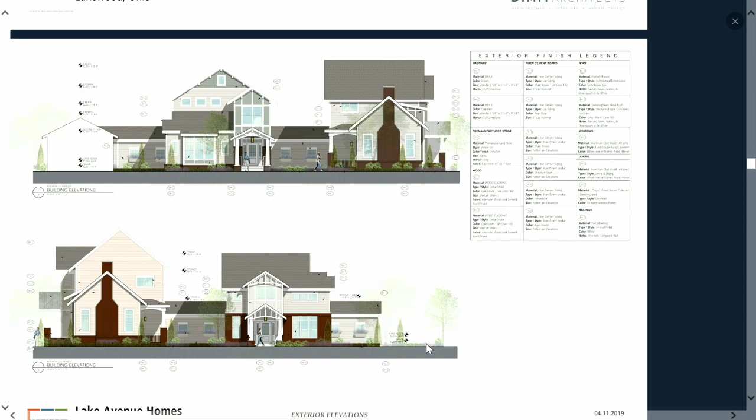The thought of the overhangs had crossed my mind too after my comment, not looking at the elevations in front of me, but how those interact with each other. I will say this: I really appreciate what you've done with the roof line of Unit C in respect to the overall massing, shifting as much of that mass forward towards the front of the house. Just seeing that contrast when you showed the two massing earlier in the presentation, it's a pretty stark contrast. But no, I do think if we can have the setback match to the corner of the house, that would be appropriate. That would work, yeah. We have over 2 foot overhangs on these roofs here. It's that Craftsman style.

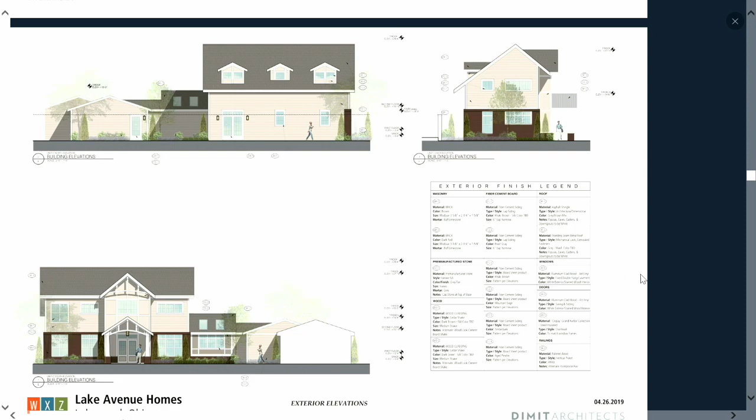So was there clarity to adjust it? Or what was thought out loud here? Yeah, I think the adjustment is an additional 2 feet on the westernmost setback line. Yes, we'll do that. And then it would match Unit A to the east at 24 feet.

Any further discussion at this time?

Mr. Chair, I just wanted to echo what the rest of the commission members are saying. Not only is the applicant proposing remediation of what seems like a severely contaminated site, they're also reducing the amount of non-pervious area from around 85% to a little less than 60%. So to echo Mr. Crusen's comment about stormwater control on the site, I feel the reduction in non-pervious area will also help. I applaud you for your personal interest in the site and the risk you're taking to make Lakewood a better place to live.

There's no more discussion. Ken, would you go to the findings page?

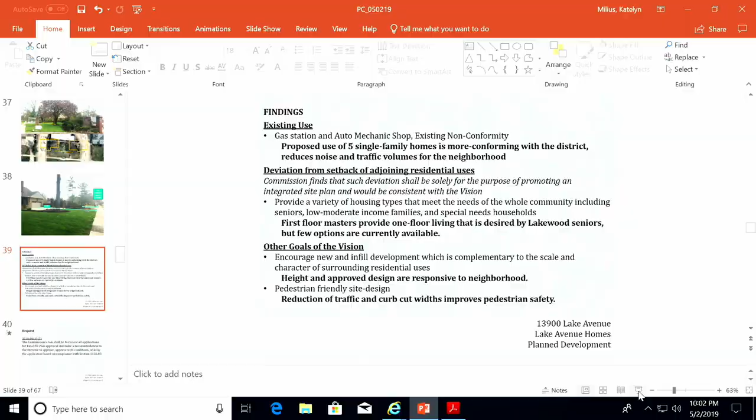Mr. Chair will make a motion to approve, or to recommend approval, of this with the findings posted here and an adjustment to the western setback boundary of 2 additional feet farther back. I'll second. It's been made and seconded. Any discussion? Does that capture everything?

Well, hold on, go ahead. Yeah, I think it's obviously about the safety, fire access, but I think that'll come through the process for building permits. Correct, they won't build anything until that happens. Mr. Chair, the only other one would be, I think...

the energy efficient design, picking a green building certification. I don't know that we need to dictate which one, but I think it's important that we carry that forward as well. That's a good point. I'll amend my motion to add... green building design, Mr. Chair.

There's one more: the landscaping in front of that wall on the west side was not in the site plan presented, but should be in the final approved site plan. Well, we understand that's an ABR approval. That's why I asked about the landscaping, right? So even though it's not depicted here, it's part of what's been approved by ABR already, right? Yeah, I mean, we'll just put it in, belt and suspenders, clarify that tonight. Let's do that. It is a screening measure as well, which is under the purview of the commission.

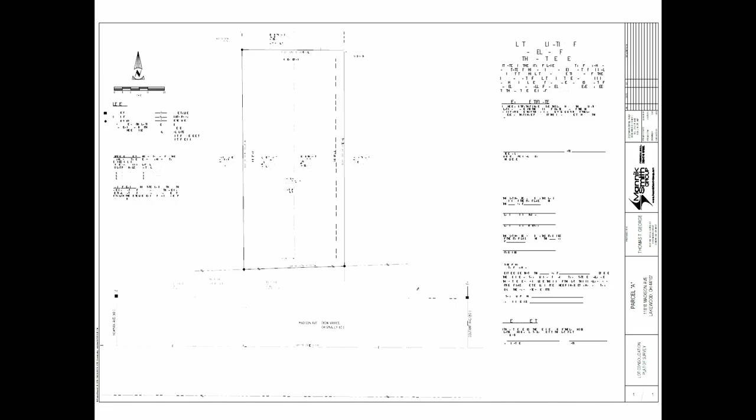So we're trying to consolidate the two single lots into one lot. I believe the gentleman had asked about the back parking lot, and there is... could you state your name?

Oh, I'm sorry, it's okay, state your name and sign in. My name's Steve Barlow, I'm a professional surveyor for Mannik Smith Group. We're at 2600 Chagrin Boulevard in Shaker Heights. And my name is Christina Dahman, and I work at Ice Miller, here as an agent representative of GTI.

Do you have a trip back to Columbus too after this? You have to. What's the gentleman's name who came to the last two meetings? John Overly. Yeah, he really did you a favor by making you come back. This is actually the earliest it's going to end. No, but I appreciate it, and it's good to meet everybody. And he says hello. Very good.

All right, so if you can continue, it's a lot consolidation that was required by our last approval last month. But I believe you were talking about the back parking lot. Yeah, the back parking lot, when I was doing the research for the boundary survey, I found an easement across the westerly adjoiner to the parking lot parcel. I can't say for sure that it is still in force because I'm not a title researcher, but I did find the original deed, or one of the original deeds for that parcel shows the easement, and I also found a survey plat from 1980 that still shows that easement. I don't know if there's any other concerns as far as the survey part of it goes.

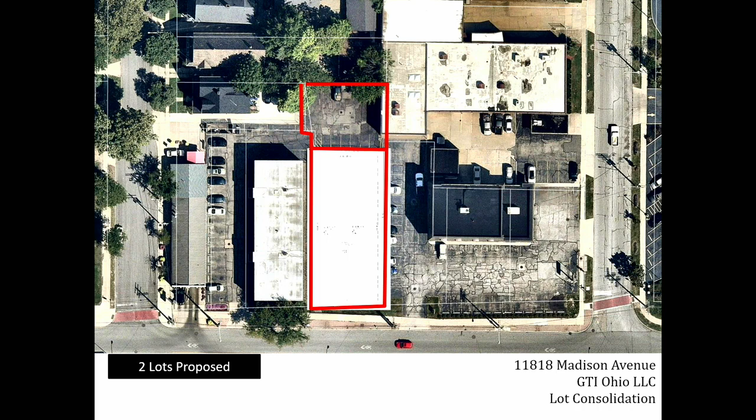Thank you very much, good luck, safe drive back. Motion to adjourn. All right, next docket item, for our very patient folks, docket number 0511-19 at Castlewood Apartments.

Welcome, good evening. I'm Tiana Brandt with Shersa Consulting on behalf of Sprint, and we are here for the apartment building Castlewood Apartments, 17600 Detroit Avenue. Sprint is proposing to add an additional 3 antennas. I believe there are originally 3 now, and we're going to replace the existing 3, but then add another 3.

And they have agreed to not paint the antennas the color that they currently are, but match them to the building.

Thank you. Mr. Chair, as you can see on the building, there are existing antennas which they will be removing. They are replacing these antennas with some additional equipment and additional antennas. Because it's not a one-for-one replacement, it is before you today, utilizing the same system but adding some units.

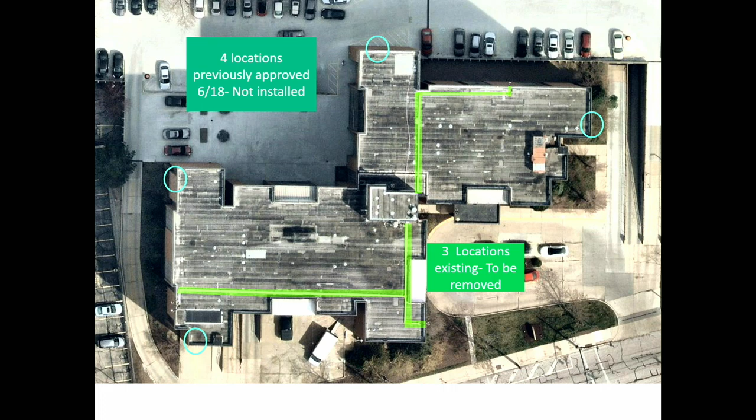This is where the existing antennas are, and there was a proposal on the same building before us in June that was approved, approximately in these areas on the rooftop. Those have not been installed to date, but will be coming likely this summer as part of T-Mobile's system. So they will be removing the antennas at these locations and adding their systems and additional antennas at the green locations. If there is any conflict in this area, there may need to be some shifting between the systems, but it's more a matter of quantity rather than specific location for us.

The antennas are going to be installed in line with the parapet as requested, and this is in an existing location of a cabinet currently. They are 8 feet in length, if the applicant could confirm that, which is less than our 12 feet.

Yes, that is correct. Again, painted to match the brick building. There are a few that are unpainted on the roof, and it does make a big difference to paint it the same color as the brick, so we would want to make sure that happened. That is all I have.

Very good. Any comment from the public? No public? All right. Any comment from the commission?

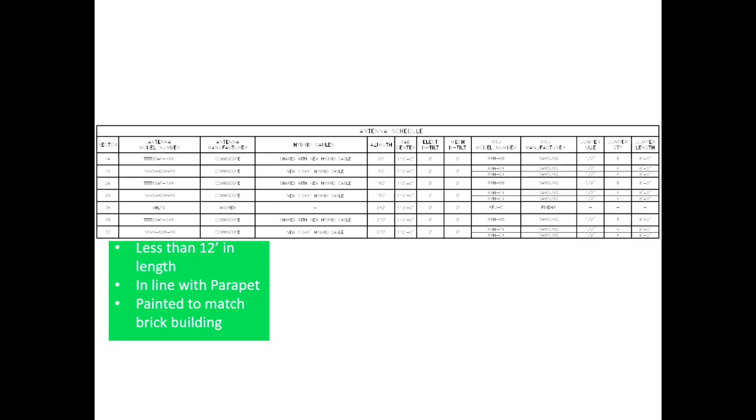We have some sizes of the antennas that we propose to place, and they are in very tiny writing that I might need my colleague to read for me. What does that say? That's 63 inches. I'm sorry, 63 inches. Oh yeah, sorry, we're both blind. And this one too, 72 inches. So they're both less than the 8 feet we even discussed. And what's up there now is something similar in size, but I don't have that exactly.

The note actually said all connecting hardware and everything to be painted to match existing as well, so it's not just the antenna.

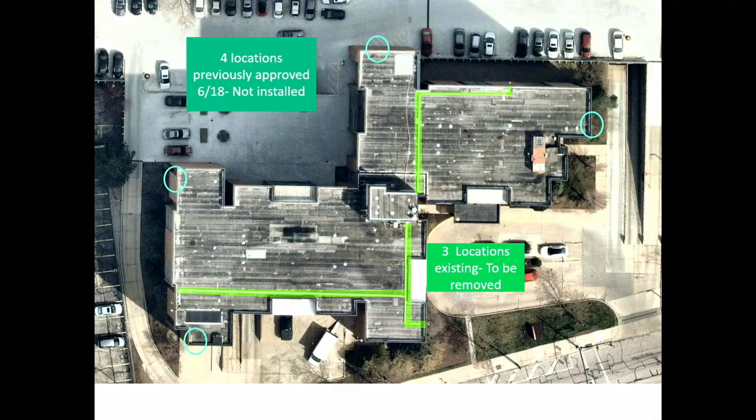Great, all right, any other discussion? I'll make a motion to approve these antennas, to clarify, to match existing building. The note that's on there says proposed Sprint antennas, mounting hardware and equipment to be painted to match existing building. The motion's been made.

Is there a second? Second. Any discussion? None. All in favor, say aye. Aye. Anyone opposed? No one's opposed. Thank you very much. Good luck. Thank you for your patience.